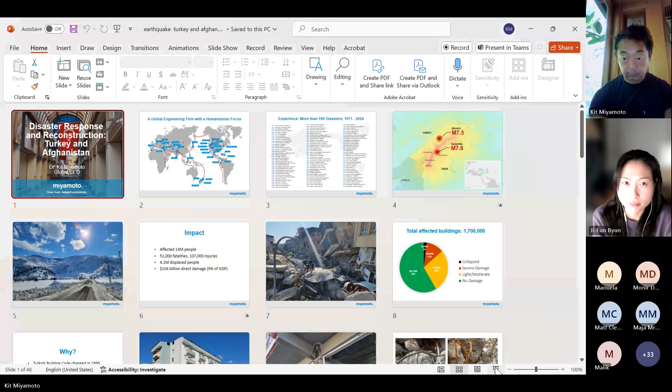Okay. So for the next 30 to 40 minutes, I'm going to present our experience in response and reconstruction, specifically in Turkey and Afghanistan, and this work over the last few years. And I'm going to have a question and answer after that. So let's go over this.

Just a little bit about our company. We're a global engineering company located in about 30 different locations, 15 different countries. And mainly, as you can see, we're located along the so-called line of fire, fragile areas not only from an earthquake point of view, but hurricane, flood, and also conflict. Over the past 30 years, we visited and worked on about 100 disasters, I think 110 or something like that. So we are active in pretty much every single disaster that happens in the world.

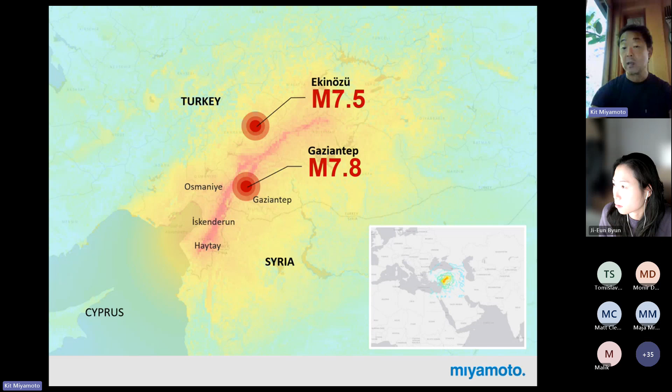Turkey, February 2023, this is what happened here. It's magnitude 7.8 and 7.5 back to back. This is the southern part of Turkey, bordering Syria. It affected an area 300 to 400 kilometers long and 100 to 200 kilometers wide. So this is a huge earthquake; 7.8 and 7.5 back to back is something I have not seen for a long time, especially in a densely populated area.

It affected about 40 million people. The terrain is beautiful, no question. But at the same time, this geographical beauty makes it very difficult to respond and recover, especially in a lot of remote areas. The impact affected about 14 million people in the strong motion area. It caused over 50,000 fatalities and 100,000 injuries. About 4 million people are displaced.

And financially, about $100 billion of direct damage. This is essentially the built environment. On top of that, the indirect damage, such as loss of jobs and many other elements, is usually 3 to 4 times bigger. So I might say this is probably one of the worst earthquake disasters I have seen since Sichuan, China. And this picture I took in Hatay, it's complete destruction.

Amazing. So we did the assessment, a combination of satellite images and on-the-ground assessment. Based on this, we counted about 1.7 million buildings in the affected area. Typical buildings are residential, 3 to 9-story residential buildings made of concrete. And you can see here, 35,000 buildings collapsed, about 2% of the stock, in the first shock.

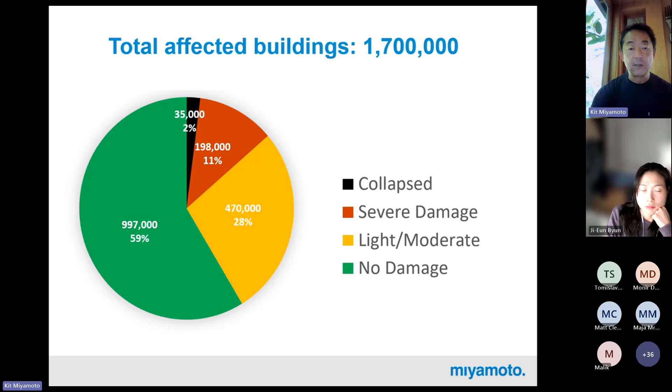So why did this happen? Is it because the engineers are bad? Because the building codes are not good? Well, there are a few reasons. The Turkish building code changed in 1998, the seismic components of it. So anything built prior to around 2000 has no earthquake consideration, no ductile details, none of this stuff.

So that's really dangerous. Second, there's no license system for either contractors or engineers, and no inspections required by engineers for privately owned buildings. So as you said, this is the typical building you see out there: small apartments. Some are pretty sizable though, 100 units, 150 units and so on. But it's a reinforced concrete system filled with masonry infill.

These are some of the typical structural damage you see. This is a lucky one, it did not collapse. So this actually, believe it or not, met the intent of the building code, because when we engineer buildings, whether in Turkey, the US or Japan, the intent is to provide a life safety minimum. So the building will sustain major deformation, major failures, what we call inelastic behavior, to absorb the seismic energy. So this is actually a normal thing you're looking at here.

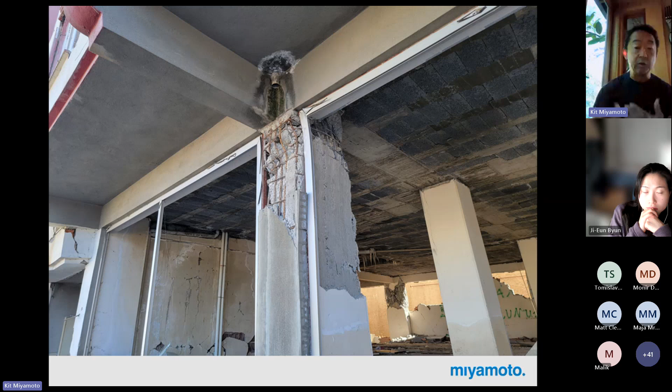Is this repairable? Probably not. First of all, there's quite a bit of tilt and permanent displacement, and also most people don't want to go back to the house even if it's repaired, because it doesn't look so good. But in many cases we do repair this kind of thing, and when we do, we add additional lateral force resisting capacity, like adding concrete shear walls or wrapping all the columns and so on.

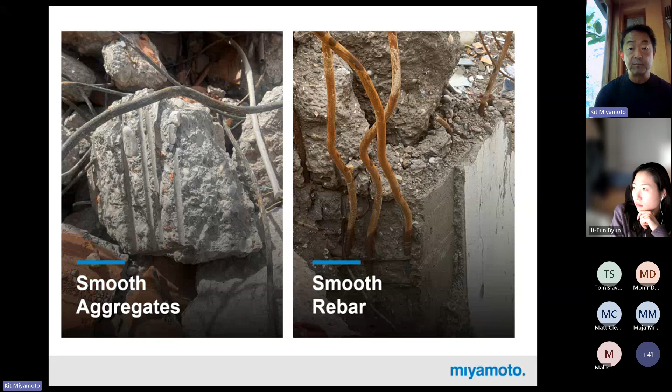The main failures come from not following the construction protocol. As I said, there are no engineers in the field for inspection during construction. So I saw a lot of defects like this, like using smooth rebar, not enough confinement, details not quite right, and aggregate like smooth, big rocks. You see things like that in the mixture. And obviously, the older stock of buildings, like this soft-story one, become like that, as you can see.

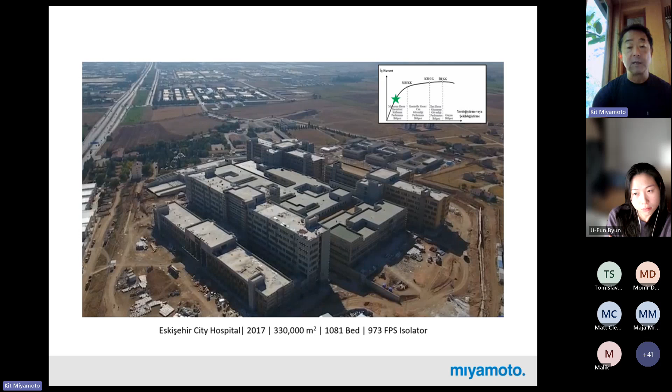But there are many failures, as you talked about, about 30 to 40% of buildings are severely impacted, but 60% of buildings are not, and many of those are public sector buildings like hospitals and schools, viaducts, roads. Those are actually fairly untouched. So here's the video of the hospital. This is base isolated. That's the isolation plane. You can see the building is sliding back and forth to absorb the energy.

There are about a dozen hospitals in the most severely affected area, and they are designed using base isolation. A building sits on the ground, so when the ground shakes, we move with it, and it causes inertial forces and deformations, and that causes the issues, right? But if you provide an air gap, per se, the ground can move as much as it wants. Obviously, we cannot provide an air gap, so we provide rubber or friction pendulum isolation devices, which are essentially rollers. It just decouples the building from the ground motion. That's what base isolation is.

So there are 12 hospitals like that. Not only did they not get damaged, but they're fully functional after these major earthquakes. That's pretty incredible. So this is not about the technology lacking. There is great knowledge in the Turkish engineering community, the building codes are as good as anywhere, and education is as good as anywhere. But the lack of inspection for private sector buildings, that's the cause of this incredible destruction.

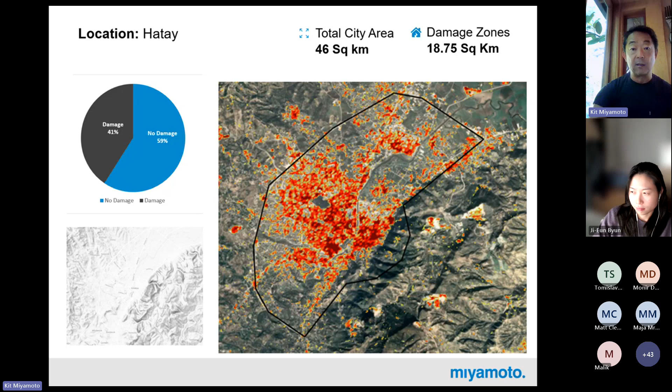This is Hatay, we talked about a little bit. Here about 40% of the building stock was damaged, and especially in the downtown core, essentially 90% of buildings are heavily damaged, something like what you see. The reason is there's a big river coming through, and a lot of soft soil in the area that causes amplified motion. But this is a similar building right next to the disaster area. This is well-built construction. You don't see even a scratch.

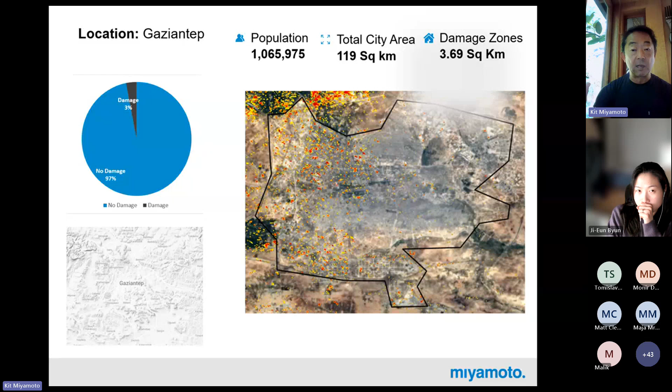And the damage itself is very random. This is the town of Gaziantep, one of the large major cities there, and 97% has no damage whatsoever. Why is that? Well, it helps: rocks. The city itself sits on very hard soil or hard rock, so the ground motion did not amplify much, even though it's right at the epicenter.

So what we did is we tried to assist the Turkish people and the government by hitting the gaps. The Turkish government is really tied up addressing the totally collapsed buildings and also the severely damaged construction itself. But, as you saw, there's 30 or 40% of buildings which are moderate to light damage, and also the green buildings which may have certain cracks, but people feel uncomfortable going in.

So we got funded by USAID, CRS and Habitat for Humanity to provide solutions for this light, moderate, and undamaged construction, so people can get repaired and get back home. So we actually assessed almost 24,000 undamaged buildings and 12,000 of light damage on top of that. This assessment is not only damage assessment, but actual repair quantity assessment. So engineers go in there with an app, just measuring the cracks, and are able to come up with a BOQ right on the spot, so the residents can really act on it quickly.

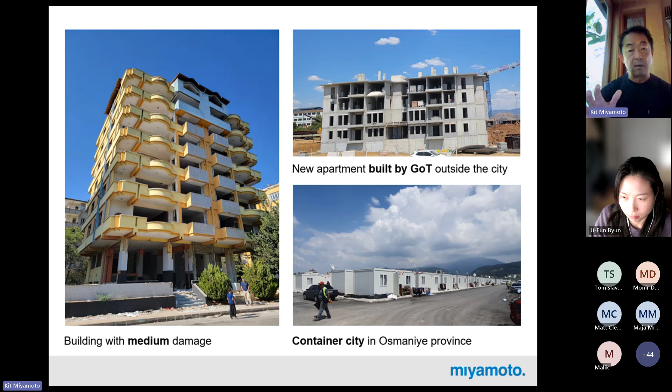This really tries to address the heavily damaged construction piece, but I think one of the things we have to look into is the moderate, medium damage construction, which you can see on the left side. Certain structural damage exists, but it's definitely repairable and strengthenable. I think that's very important to do. Otherwise, you're going to end up seeing the so-called donut effect: there's nothing in the middle of a city, but everything is built up outside. You don't want to do that. You really lose the whole community concept. So the repair component is very important. Not only is it cost effective, usually with repair and strengthening you're looking at an average of about 20% of the replacement cost. So essentially it's a 1 for 5 deal.

So now let's fly back to Afghanistan. In 2022, there was an earthquake which affected almost 100,000 people and destroyed houses. And this is a very fragile area. It's the southeast corner, where the Taliban actually originated from, and it's on the Pakistan border.

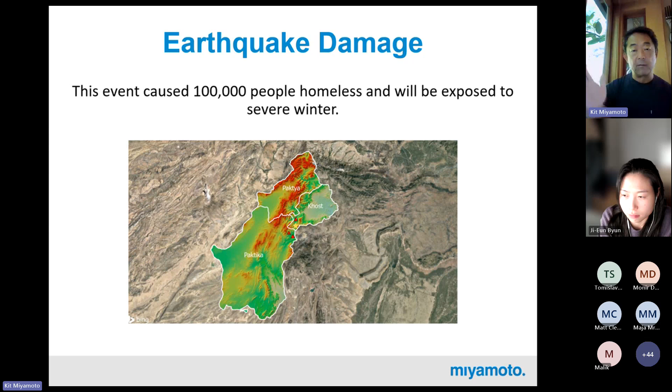So first, we again did the remote satellite-based assessment to understand the damage index. When we do it, we overlay the before and after pictures, before the earthquake and after the earthquake, and understand what the displacement looks like, and based on displacement, we tag them.

And we've been working with NASA JPL for almost 10 years now to refine the system, and I think now it's definitely deployable. We use those maps quite a bit, especially in the Turkish earthquake, to guide our team to go places.

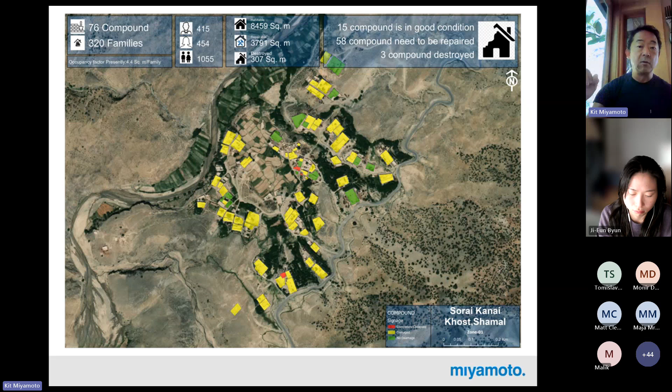So based on this assessment, collapses are 17%, almost 20%, and yellow tags, the moderate damage but still repairable, are 50%, and greens are 30%. So as you can see, 70% of the buildings had some certain impact in the area.

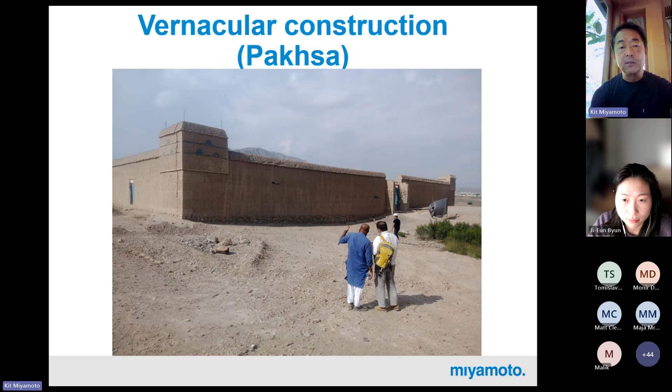Here's what typical construction looks like. It's multi-family residences made of clay, or a pakhsa wall system. So here's a social structure made up like that. Usually we notice about 30 to 40 people live in a compound, and it has large walls, and all the social activity happens inside the courtyard. You see agricultural land inside, and a playground, water, the animals. That's how the urban structure is built.

A very important part of this is privacy for the women. It's very important. Their appearance and noises cannot be public. So in a compound system like that, women are free inside. It's a very important concept. I know for Westerners, we maybe don't see the reason for it, but it's been a cultural system like that for thousands of years.

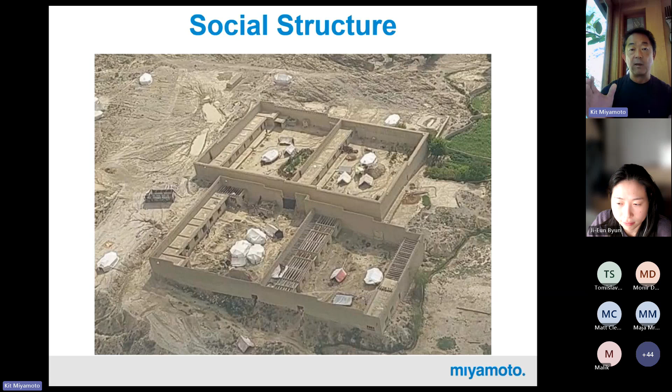And I'm not here to make a judgment about good or bad. As humanitarians, our job is to repair and construct back the houses and villages so people will get back to normal conditions as before. So this is what a typical system looks like. And I must say that we found a lot of genius in that structural system.

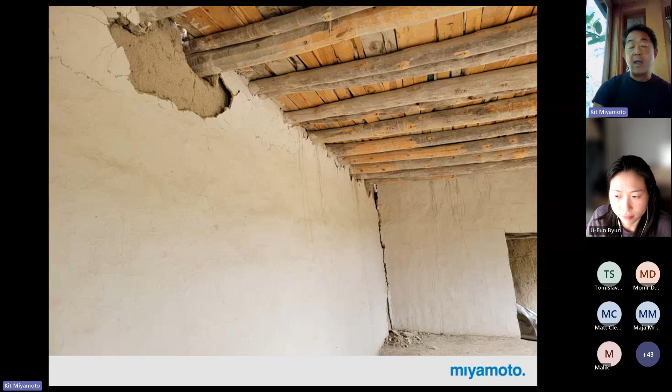This is the roof purlin, just embedded into the clay wall. And what happened is that it's almost like friction devices. The walls were rocking back and forth, and the roof purlins or beams embedded into them. In many cases there's enough bearing length. The wall moves, and I saw a lot of damage in the wall, but that's actually causing energy dissipation by the friction action. But the problem is that if there's not enough embedment into the wall, it falls off. So that's why most of the people actually died.

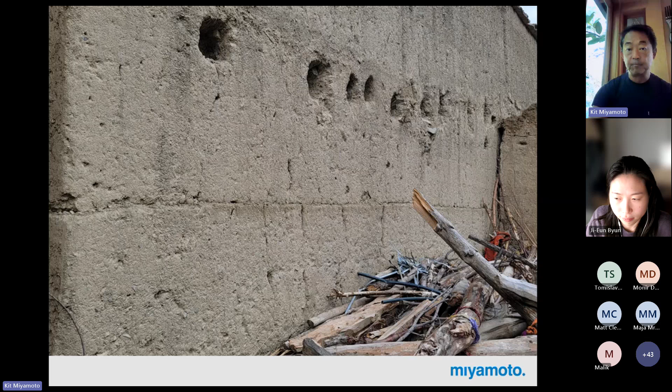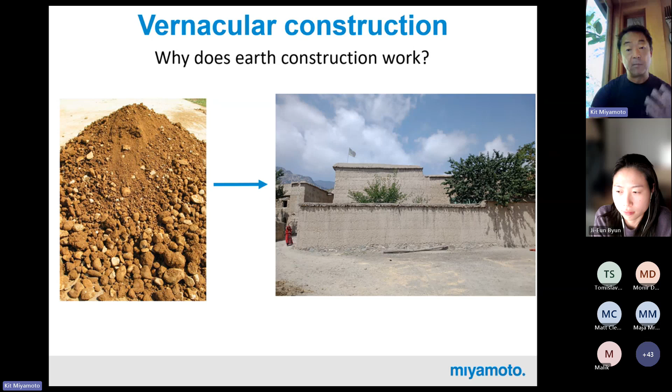And also the clay roof itself, many houses don't replace it on a yearly basis. They keep adding to it, so it becomes thicker and thicker. And obviously, the heavier the mass, the bigger the earthquake force. So how did the vernacular construction work here? How does earth construction work? Just made of earth, no cement, nothing, no aggregate.

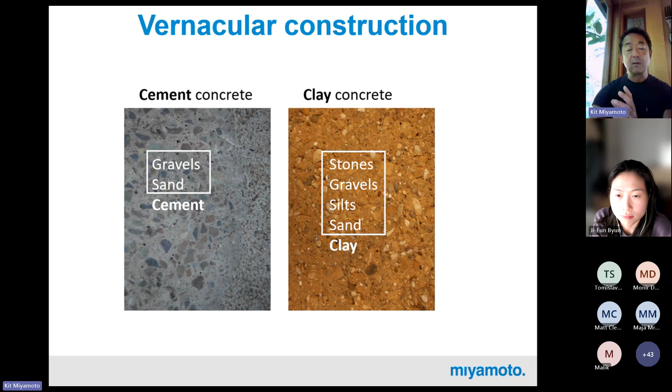Essentially, if you compare cement concrete and clay concrete, they're very similar. In cement concrete, gravel and sand provide strength, and cement just combines them together. Clay construction is the same in this particular case. Silt, sand, everything else is essentially combined by the clay itself.

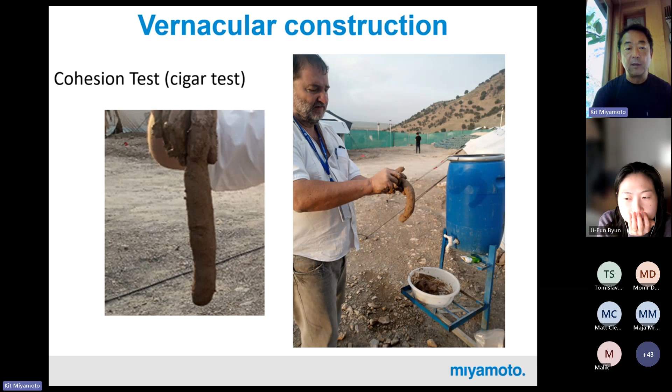So we actually brought clay construction experts from France, and they sampled many sites to do cohesion tests and many other tests to understand what works and what didn't. The findings are essentially that the traditional housing is unique, and if it's built right, it's a very, very robust earthquake-resistant system. It uses the concept of rocking and friction movement of the elements, and everything is locally available. You can harvest this clay and rocks from the ground right there to build this construction.

This is very important, especially in a remote area like the Afghanistan-Pakistan border I was talking about. There's no way to bring steel and concrete. I'm sure there are ways, but the problem is it's not sustainable. It's not like they can do that forever. So the more important thing here is to understand the strengths and weaknesses of this vernacular architecture, specifically address the weaknesses, and emphasize the strengths. And that's the whole capacity building component of it.

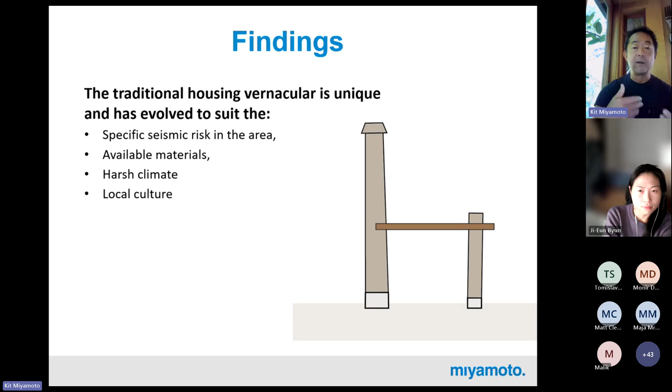Our engineers trained over 2,000 local masons in the area, and we provided funding to repair those houses using that labor. So we created very simple key technical messages, such as the height-to-thickness ratio of a wall. They're usually 50 centimeters wide, 5 meters high, that type of thing. And also the beam, and a really important thing is the clay protection.

They have a plastering system, and that has to be there. It's very important, otherwise clay does melt. And down the bottom, the foundation's well-built construction made of rocks. That's actually very important to prevent erosion, provide the protection from a flood and the water. And the roof thickness itself, they have to replace that. We just make sure that it's not more than 8 inches. That's something that we insist on.

And most importantly, the bearing length of the purlin into the wall. So these things, it's not like we invented it, by the way. We extract this knowledge from the master masons in the area and how they see the best way to build. And we use the knowledge, we analyze it using finite element modeling to understand the safety factors and what kind of earthquake it can take. And we convert that into a key technical message like this, a very simple message, and build the capacity in the villages and the masons and the contractors in the area to facilitate their own reconstruction.

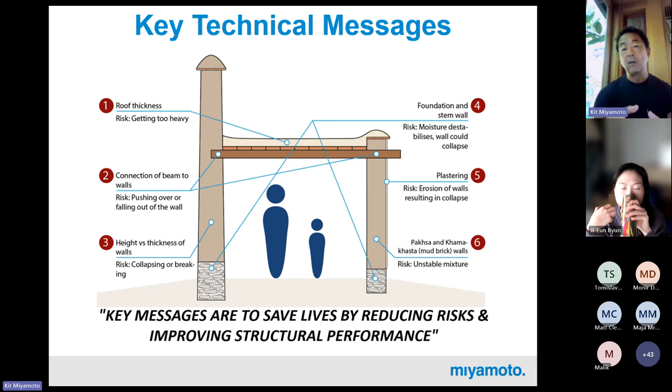So now this particular message is not only useful right now for reconstruction, but it will also impact the generations of masons to come. I think that's a very, very important concept. This is something we used everywhere. In the Haiti 2010 earthquake, which killed about 300,000 people, our team, from 2010 to 2015, trained over 10,000 masons. And to this day, you see the impact on how people build in the remote parts of Haiti. Just that knowledge is probably the best thing we can share. So it's part of a broader campaign. Training is not only done for the adult masons, but also students, the kids; we have to widely disseminate the message as much as possible.